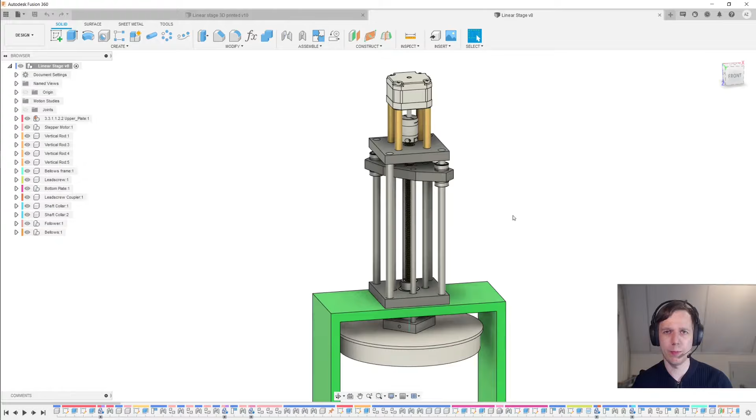In this video I want to show you how to model this thing right here. This is the pump module from the Polyvent project. It uses a stepper motor up here to turn this lead screw. And as that lead screw is rotated, this plate here moves up and down, and that ultimately causes a bellows which would be mounted between these two plates here to be compressed and expanded, which pushes the gas around.

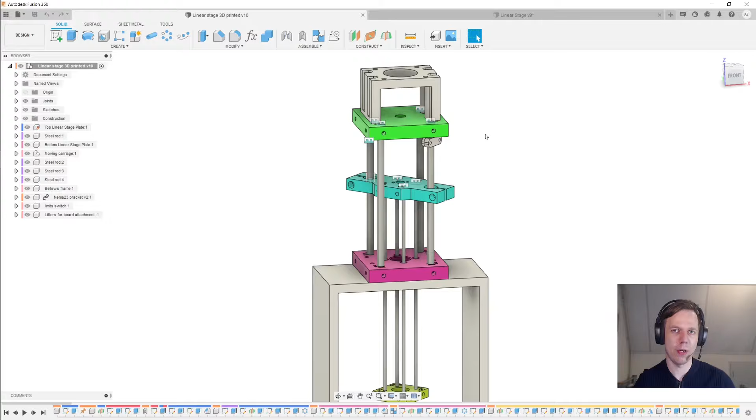Now I'm telling you that because I want you to know that this is a thing that we've built in Austria in real life. This is not a contrived toy example. And as we were building it, we came to a couple of design improvements that we've captured in this new design over here, though this design here lacks a couple of the features like the lead screw and the bearings. So today we're going to create a combined design that captures the best features of both.

Hi, Future Antal here. This here is the model that we're going to have by the end of today's video. The first thing I want to make today is this green plate over here, which supports both the motor bracket, these vertical rods over here, and it also has a pocket for the bearing to go into over here.

So let's create a new design, and here comes the first habit that you really have to get into. For every new multi-component design, the first button that you really have to press is New Component. So here I want an internal component. I want this to live inside of this file, and let's just give that a name of top plate or something. We can change our mind later if we wish. We also want to make sure here that we activate this component upon its creation.

Next, we'll create a new sketch, and I will put that sketch on this horizontal plane over here. I hit R for rectangle and select the center point rectangle there. And then I'm going to give this dimensions of 80 by 80 millimeters. This is mostly an educated guess at this point, though we can come back later to change our mind.

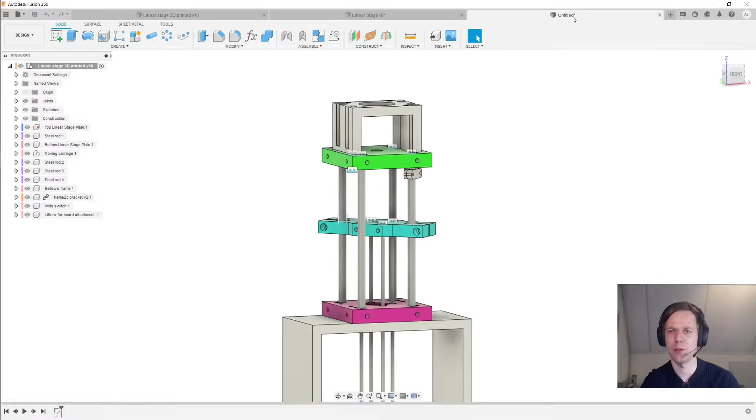Of course, it doesn't make any sense for me now to come to these files here and start taking dimensions here. That's just a chicken and egg problem then. So let's just take 80 millimeters for now. And I'm also going to create a second rectangle also from the center. And I'm going to make the diagonal distance here, let's say 90 millimeters.

And then I'm going to hit C for circle and create a couple of circles here. And those will be the pockets that the rods are going to go into. So select all these circles and give those the equals constraint, and then D for dimension and make that 8 millimeters. Now one of the things I'm interested in here is to check what the distance is between these two.

So you just hit D for dimension and you will get a driven dimension here. And now I do have a little bit of a problem here because I am getting 8 millimeters here, which means that the distance between this circle here and the edge of the plate is only 4 millimeters and a little bit, and that is probably not enough for what I want to do later.

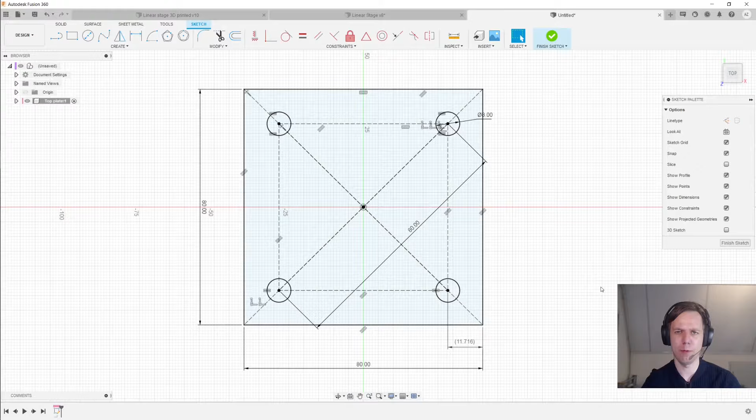So what I'm going to do right now is just change this distance to 80 millimeters, and that will give me more distance here. And again, if we need to, we can make this plate a little larger later on. So finish the sketch, E for extrude, and then we are going to extrude this thing up to, let's say, 10 millimeters thick. The next thing I want to do is create the hole for the lead screw and the pocket for the bearing.

So I'll create a new sketch and put that on the bottom of this plate. Then hit C for circle, and then one circle is going to be 22 millimeters. That's the outer diameter of a 608 bearing. And then the other one is going to be 12 millimeters because I want the hole to completely clear the inner race of the bearing. So first I'm going to take this inner bit here and extrude cut that all the way.

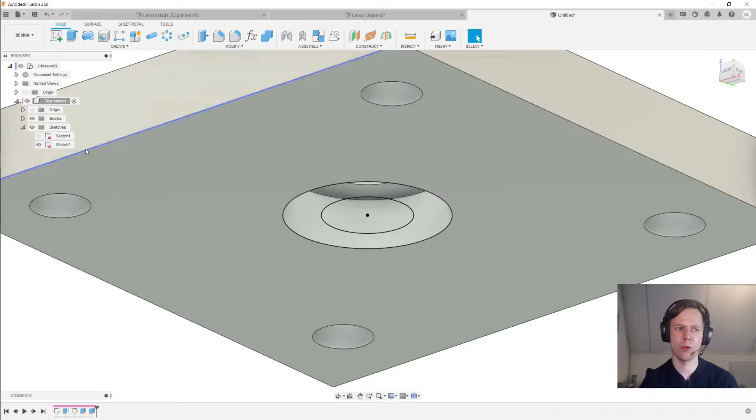Going back into the component, I unhide the sketch and hit E for extrude, then this thing is going to go up by 7 millimeters, also a cut. Now we have a pocket for the bearing to go into and a hole for the lead screw.

The next thing I want to do is add the steel rods that come out of this plate. To do that, first I go here and activate this root component, then create a new component and call it vertical rod. We can change the name later. We want to activate it and have that internal, then create a new sketch on this top surface.

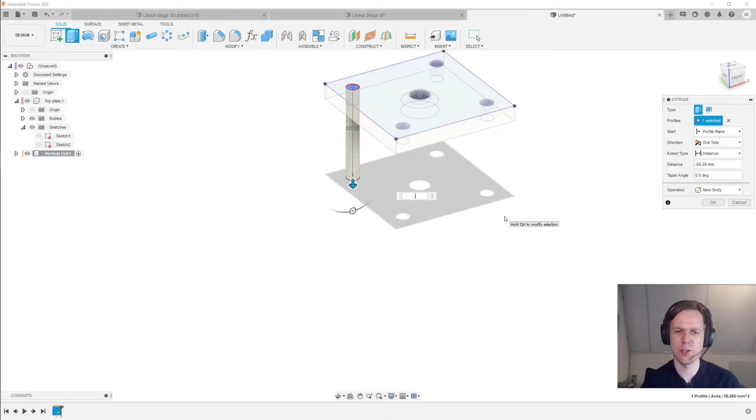I'll hit P to project that top surface in, and then I can finish the sketch. Now hit E for extrude, and extrude this downward by some length. Again, this is mostly a gamble at this point, so let's make it 200 — a length we can come back and change later. Operation here is going to be new body, so click OK.

Now we have a single steel rod, and we just need to make 4 of those. Before that though, there's an important problem to fix: these components can currently just float around in space like this. So hit Ctrl Z to put that back in its original position.

I'll activate this root component again on the top left, then right click this top plate and select ground. That means this top plate can no longer move around. What you eventually want is one component that is grounded — usually a base plate, frame, or casing, something to that effect — and everything else is fixed or moving in relation to that grounded component.

So now I want to create a joint between this steel rod and the center of this hole. I'll select flip here because I want it to point down, and under motion I want to ensure I have rigid. With all that set up, I click OK, and now both of these components are fixed in space.

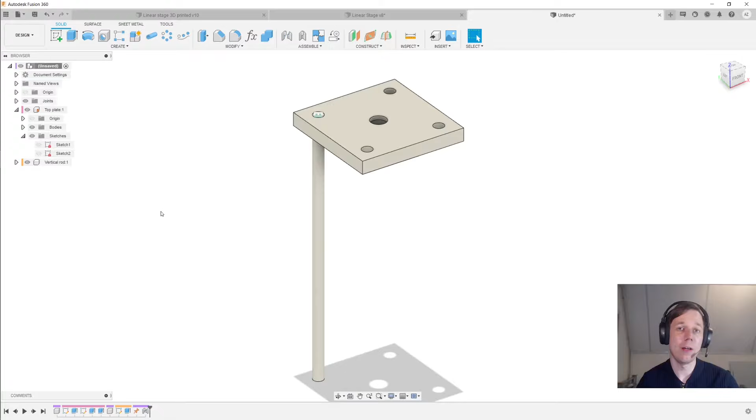Now let's create some more of these rods. I'll right click this vertical rod component and select copy, then right click the root component and select either paste or paste new. If I want these components to remain the same into the future, I select paste. If I select paste new, the new component lives an independent life from the previous one.

I want these rods to have the same length under all circumstances, so I'm going to select paste — I want these rods to always be identical. I hit paste, and then I try to line that up with the hole, but that's not going to work easily because of the dimensions we had before, so I'll just drag it out in space over here.

Then I'll create a joint again between this one here and that one here, and again that's just going to be a rigid joint. Click OK, and then we just have to repeat that two times over.

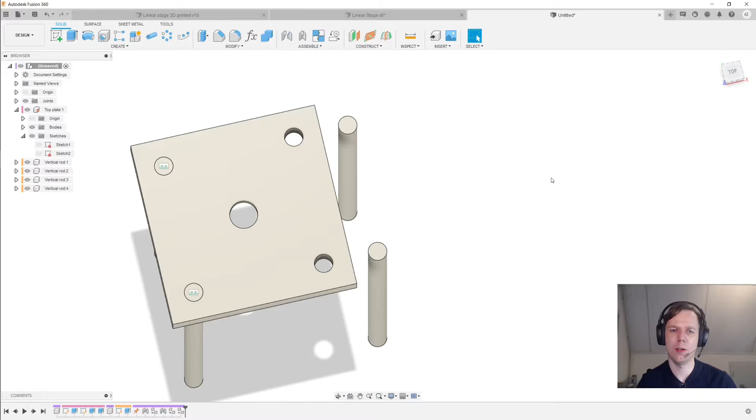Now I can select both of these two vertical rods and select copy, then under the root component, paste, and move them over to the side here. Click OK, and then again some joints — click on this thing, and if you hit Control it automatically snaps to this point of interest there. Flip that and do it again for the other rod. And there we have 4 rods.

The next thing we need to do is create a method for affixing these steel rods into this plate. Currently our intention is to 3D print this top plate, so we're going to use set screws with embedded nuts, and the first thing we need for that is pockets for those embedded nuts.

Let's first activate the top plate and create a new sketch on this top surface. Then from the center of this circle, I'll make a construction line, and then I hit R for rectangle and create a rectangle like this.

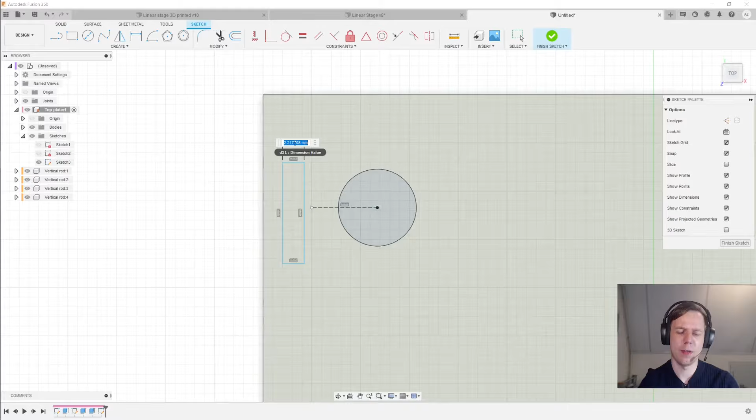And then this dimension here is going to be 3 millimeters, and this one's going to be 7. And we want the midpoint constraint between this line here and this endpoint of the line here. And then we want this length to be 5 millimeters so that it is a little bit outside of the outer edge.

Now we're basically going to repeat the same thing on the other side, on the top side. And here we're just going to use equals constraints so that we have the minimum number of explicit dimensions to drive this. And then these 2 need to be equal as well. So now I can finish the sketch.

And now when it comes to the nuts, you have 2 choices. The obvious choice is to use regular hexagonal nuts, but it is much easier to use and to model for square nuts. Now square nuts you can't find everywhere, but if you look around a little bit, you should be able to find them. You can get them at the Hornbach, for example, but also Conrad and a few other places.

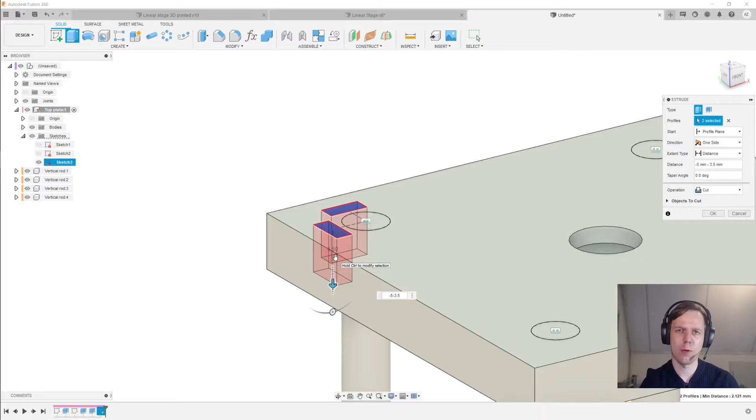So now I can just hit E for extrude. And we want to extrude this to the halfway point, plus another half times 7, which is going to be 3.5. Now we can do a little bit better than this.

So what we're going to do is construct a midplane between this surface here and that surface over there. And then click OK. And then we're going to hit E for extrude again on these 2 profiles, and then we're going to do it to this object here, with an offset of 3.5 millimeters. And in this way, if we change the thickness of this plate, then these pockets will still come out to the halfway point.

So now we can click OK on that, and we can also hide this construction plane that we just made.

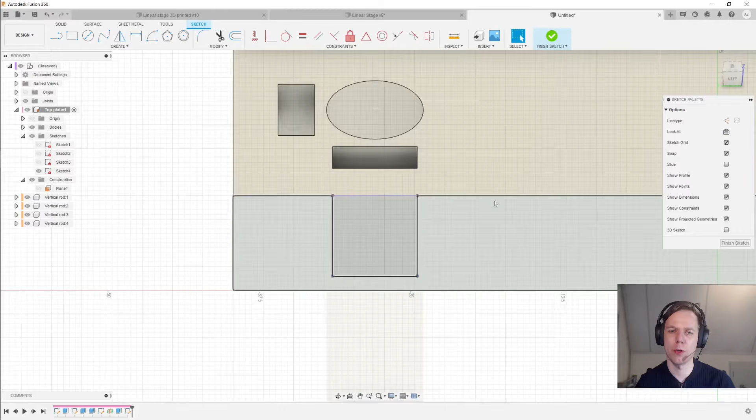The next thing we want to do is create the holes for the set screws to go into. So let's just create a sketch on this side profile over here, and then hit P for project. Project this rectangle into our sketch. L for line, X for construction, and then just draw a construction line straight down. And then hit C for circle, and in the center of this line you look for this automatic midpoint constraint.

And let's call that 4.3 millimeters. That's a good clearance hole for a M4 set screw. Now hit E for extrude, and we are going to do that to this surface over here, and then we're going to enter an offset of 5 millimeters. Okay, so minus 5 millimeters. And that ensures that this cut ends up all the way in the middle of this shaft and hole over here, so that it's certainly all the way through.

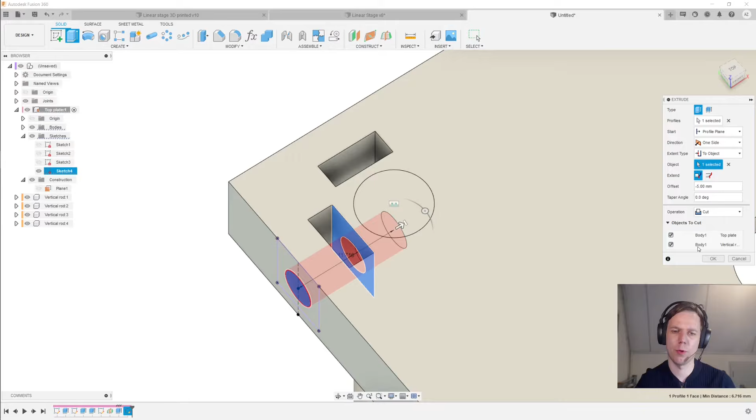Now the one thing you do have to keep in mind is that if you look under Objects to Cut, we do want to cut the top plate, but we do not want to cut into this vertical rod. That's not our intention here, so uncheck this, and then we can click OK, and then we just need to do the same thing on the other side.

So now we just go over to the other side, create a new sketch here, P for project, X and L, C for circle, 4.3, E for extrude, and again to an object with an offset of minus 5, and again under Objects to Cut, make sure that you uncheck the vertical rod.

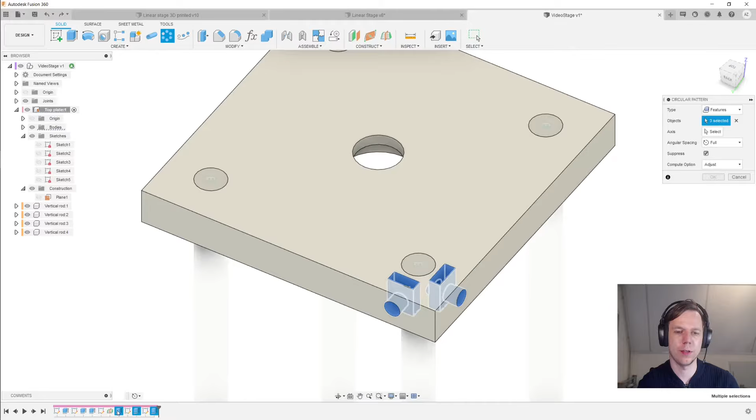Next thing we want to do is ensure that all 4 of these rods have these pockets. So under Create, we go to a circular pattern, and then the type will be Features, and it'll be this guy, and this guy. And that will go around this axis over here, this bore of the bearing. And then under the quantity, we want 4 of those, and then we can click OK. And then we have these pockets on all 4 corners of this plate.

The next thing I want to make is the bottom plate, and that's going to be largely identical to this top plate over here, but slightly different. So for that, I'm going to copy this top plate, activate the root component, and do a paste new in this case, because again, I want this thing to be not quite identical to the top plate.

So I'm going to pull this thing down over here, and in this case I can probably align that exactly, like so. And then we can click OK. Now of course at this point this new plate is free to float around like this, so Ctrl Z.

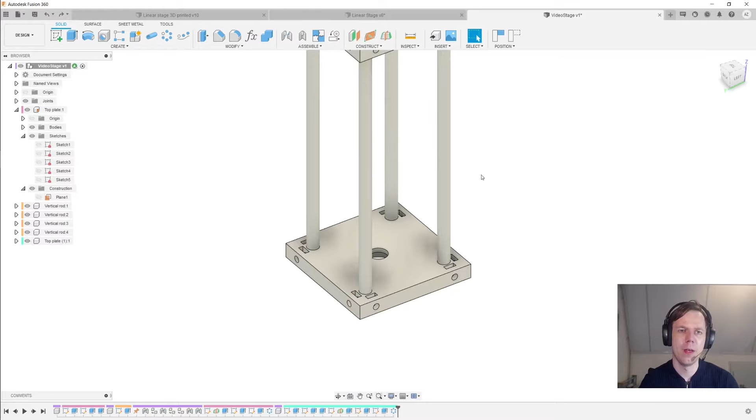And then we can use a different method to fix this one in place. So in this case we can use a rigid group. We're going to capture the position. We're going to create a rigid group between the rod and this bottom plate. And the advantage of using a rigid group is that for very large assemblies it has better performance compared to using joints that are set to a rigid motion. So now we can click OK.

And now I'll go over here and first rename this thing to bottom plate.

I'll activate this component, and then we can go onto the timeline here and start changing some things up. So the main thing I want to do is find the sketch that is responsible for this feature over here, and that is this sketch over here.

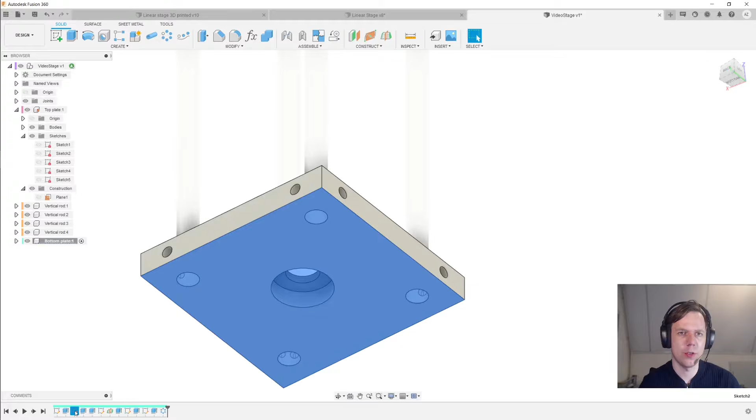We are going to redefine its sketch plane to be on top here. And for this it moves itself back up to where it came from, but that's okay.

Now that we've redefined the sketch plane, we see that the bearing pocket and this through hole here have reversed. So now we can put the bearing here, but on the other end the bearing is over here, yet at the same time the nut pockets are still all facing upwards on both of these parts.

One thing I should point out about the timeline in my case is that I have this tick box enabled, the component color swatch. That assigns a color to each of these components that you can see with this small stripe, and those colors match the colors above the features on the timeline.

The other thing about the timeline that you may have seen just a moment ago is that if I activate a certain component, the timeline constrains itself to that component and also the possible subcomponents that we'll get into later.

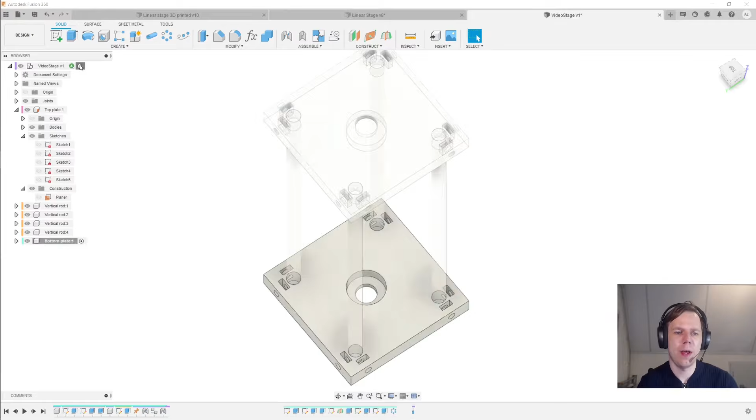The next thing I want to check is whether I can change the length of the rods while still keeping the model intact. So I'll activate the root component, and via the color matching I can easily see that this is the feature that I need to edit. Let's make these rods a little bit longer at 220 millimeters.

Now in this case I see that the bottom plate hasn't moved while it should have. So what I'm going to do is delete this rigid group that I've made, and instead I'm going to create a joint.

I'm first going to select this hole here on the plate and then the end of that rod. I'm going to flip that just to make sure it's in the right place, and that looks about right, so we can click OK.

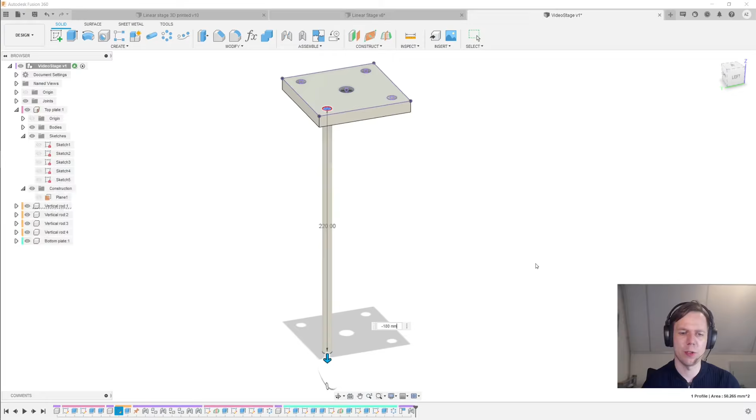The motion is rigid, so that's good. Once that's all set up, we can go again into this thing over here, and let's make that minus 180, or let's change it back to minus 200, and then everything keeps on working without any additional effort on our part.

Now I want to modify the appearance of this model because at the moment it looks a little boring and white. Here I really want to stress the difference between two different concepts.

One is the physical material, and this has the full information of a particular material: strength properties, thermal properties, all those kinds of things.

What we are going to do here is appearance, which only determines how something looks. Now, if you're interested in the total mass, the center of mass, moments of inertia, thermal simulations, stress simulations, all those kinds of things, then you will need to have physical materials associated to all of your parts.

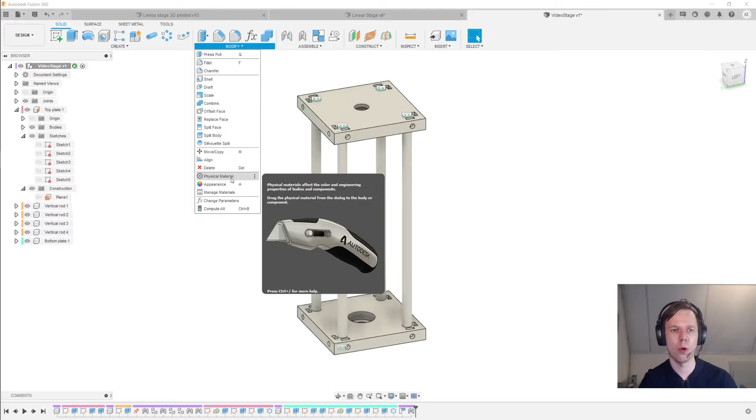If you are interested in those kinds of things, it may also be important to explicitly model all of these missing set screws and embedded nuts as well, because those will affect, for example, the total mass and the center of mass. For today though, the only thing we're going to do is appearance.

The first thing I'm going to do is look in the library for steel, and then a stainless steel polish looks rather nice. And because these four rods are all linked, they are always identical.

The other thing I'm going to do is duplicate this basic ABS material that we started with. I like to just apply bright colors to my parts just to make everything stand out from each other.

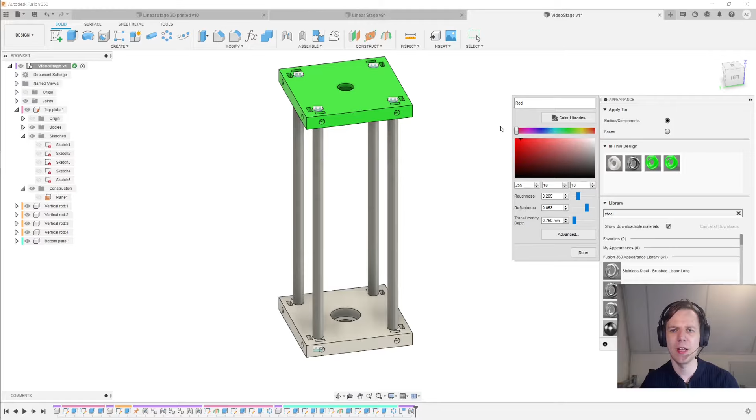So you can just duplicate this, edit, give this a name, let's call this red. I'm not generally more fancy about it than this. And just drag that onto the parts, and then I'll edit this to be named green. At least this far we have applied appearances.

Now let's get back to actually just modeling stuff. The next thing I want to do is add the bearings that go into both of these pockets.

First I'll activate the top plate component because I want this bearing to be a subcomponent of this top plate. Then I'll go to Insert, Insert McMaster-Carr component, and make this window a little bit bigger. Then here we're just going to type 608 bearing.

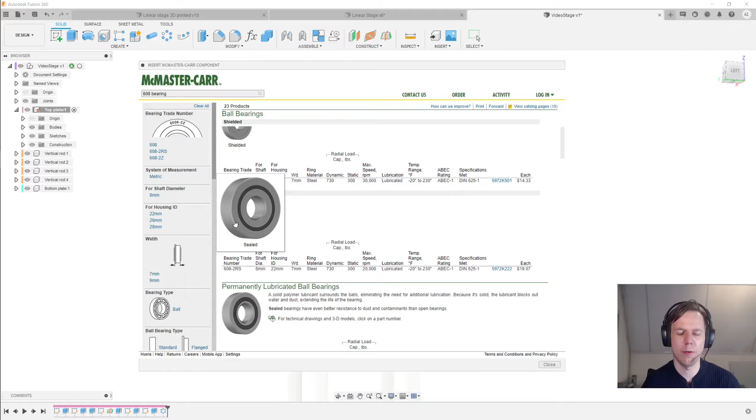And then here we are. Let's suppose we're going for a sealed bearing, a 2RS bearing, and I want the product detail here. This icon tells you that a CAD model is available. In our case we need a 3D step, download, and we get that model in here. I recommend dragging it to a place where you can see it and click OK.

The next thing you can do is just make a joint between this guy over here and this point over here, and click OK on that. And then the final thing you want to do is make this a 608 2RS. Just change the name from the default.

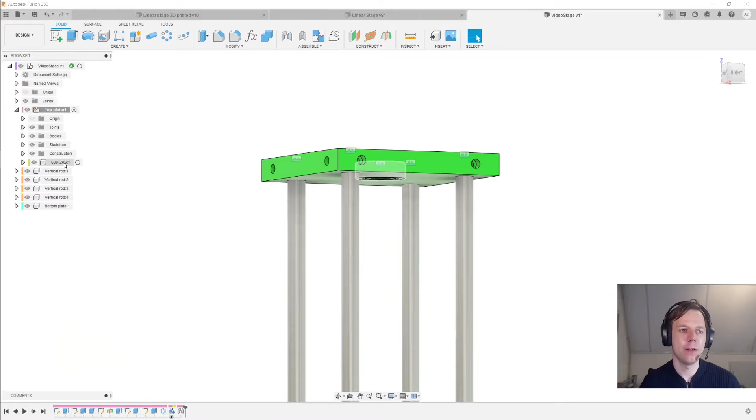Now, of course, we also want a bearing in the other plate. So what we're going to do is copy this guy over here, and then activate this bottom plate. We do paste because in this case we want the exact same bearing. Again we just drag this down to where we can see it. We don't want to drag it directly into position. And again we create a joint on this to this and click OK. And then we have both of our bearings in place.

The next part that I want to model is the lead screw that will go through the middle of all of this. So let's activate the root component and create a new component that I will call TR8x8 lead screw, or just TR8x8, that's fine. And I'll create a sketch on the bottom of this bottom plate here.

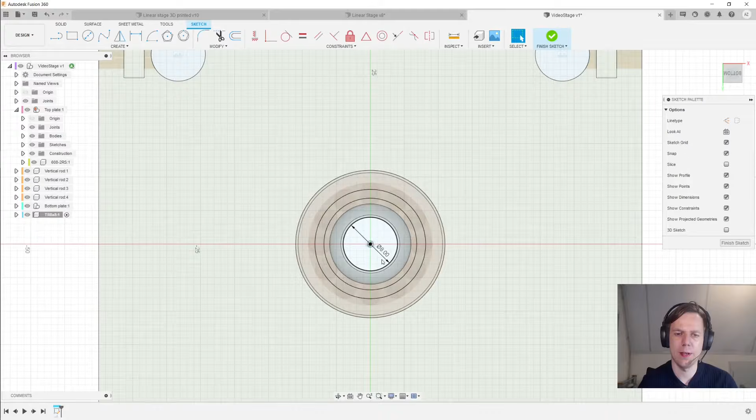C for circle, make that 8 millimeters. Finish the sketch, E for extrude. And then I'm going to extrude that all the way up to the top plate, so to object this thing here. And then I'm going to give it an offset of 20 millimeters, so it pokes out a little bit here, and that gives something for the coupler to hang on to. So click OK on this.

And then the next thing I want to do is go to thread here under create, and I'm going to select this thing here. And then here we have the ISO metric trapezoidal threads. Unfortunately the TR8x8 is not available here, so we're going to have to settle for this. If we really need the exact thread modeled, we can do that if we need to, but that's a bit too much effort for now.

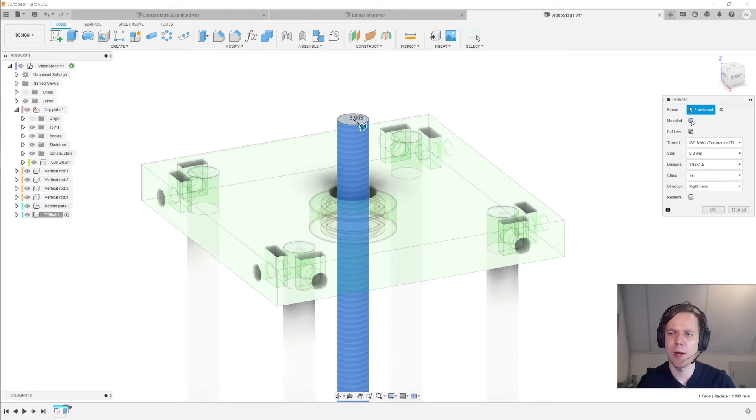The only thing that I want to point out here is that you have this tick box for modeled threads or not modeled threads. So if I tick that, we get the real model of a real thread. And if I untick it, we only get really a cylinder with a texture on it. Now the latter is much better for your performance, which is especially important if you have lots and lots of screws that you have applied such a thread to.

The next thing I want to do is create a joint for this new lead screw. So the first thing I'm going to do is activate the root component here. And the way that I've done this, I already like the position that this lead screw is in. Because of that, in this case, I'm going to use the as-built joint command.

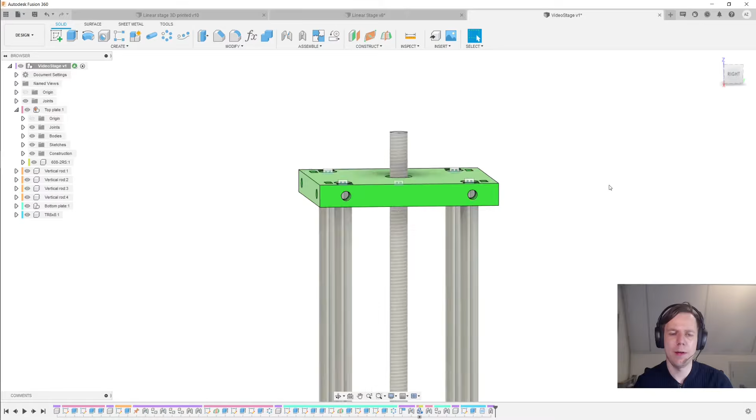So I want to joint this component here to this top plate over here. And the joint type here is going to be a revolute. Fusion wants us to put an origin for this revolute somewhere, so let's put that in the middle here. And that is looking pretty good to me, so click OK on that. And now we have this lead screw jointed to the rest of our model.

The next parts that I want to add to this design are the shaft collars that are going to hold this lead screw in place. Now to keep the file organized, I want these to be subcomponents of the lead screw. So I'm going to activate the lead screw component first and then insert a McMaster-Carr component again.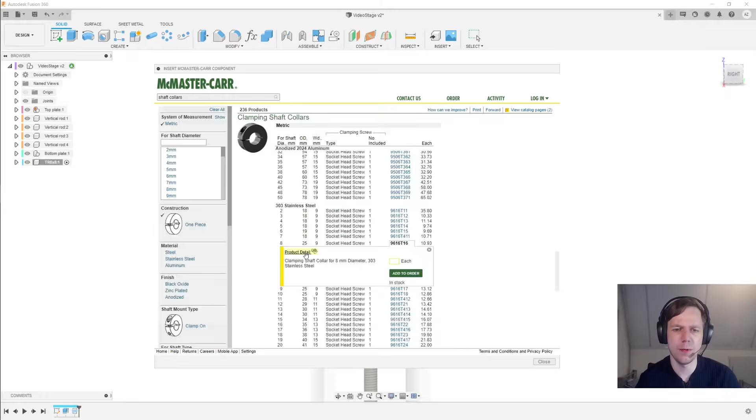And then we are going to look for a shaft collar. We want a metric one, of course, and I want a one-piece design. Here we want a clamping shaft collar, since the type that pushes a set screw into the shaft, or in this case the lead screw, doesn't really work. So it has to be a clamping variety. Now I don't want any of the aluminium ones, and I also don't like black oxide, so I'm going for this 303 stainless here. And then download the 3D step.

And then we can put this off to one side here. And now we need to make this joint, and that's going to be a little bit more complicated.

Now what we want to do for this joint is joint up the center of the shaft collar here to this lead screw. But when we try to do that, we can only snap it to either the middle or the ends of the lead screw, and that doesn't really work.

Now what we want to do is put it right over here, but if we select it in this kind of a way, then it will actually be jointed to this top plate, and that is incorrect. We want this jointed to this lead screw.

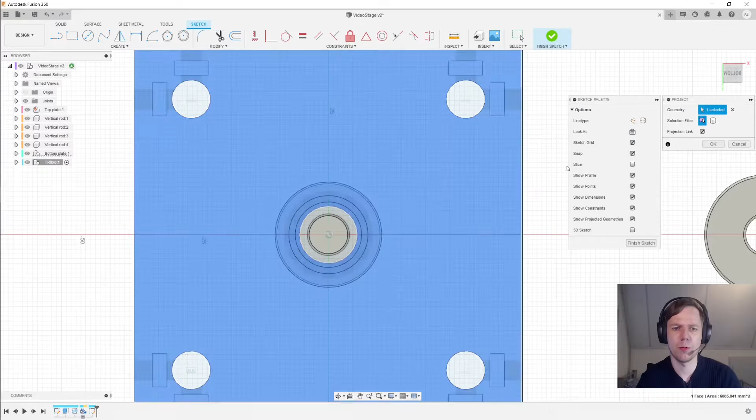So what we're going to do instead is create a new sketch on this plane over here. We are going to capture the position here just to make sure that this lead screw doesn't fly back on us. And then we can just project this into the sketch and then finish the sketch.

And what we can do now is create a joint between the shaft collar like we tried before, but now we can joint it onto the sketch geometry that we have here. And now we can click OK on this.

We have a rigid joint, so that looks good. And now we have this shaft collar jointed to this lead screw, as you can see like this. As I'm turning this lead screw, the shaft collar turns along with it, and coincidentally, so does the sketch.

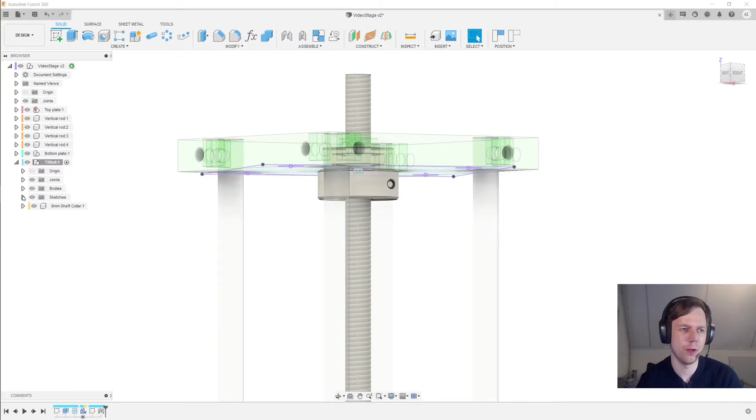So the next thing I want to do is create the next shaft collar. And so first I'll go in here and rename this 8mm shaft collar. Again, you want to have names on everything so you don't lose track of what's what. I can now hide this sketch over here.

And the first thing we'll do is create a new sketch on this bottom plate here. We can just press continue here. We don't need to capture position. We project all this stuff in so we get this center point of the circle. And then we can already finish the sketch.

We copy this thing, and then again we press paste on this here. So paste here, and we do it on this component here and not on the root component, because again we want this shaft collar to be a subcomponent of this lead screw, because that keeps everything a little bit more organized.

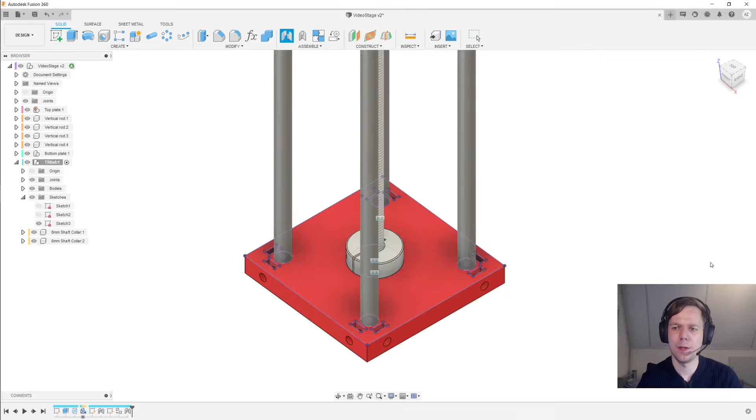So now we can click OK, and then finally we can do another joint between this guy here and this sketch point over here. And here we want to flip it so that it comes out on the other side, and then we can click OK on that. And now we have two shaft collars to keep our lead screw in place.

And as we turn this, they both turn along with this lead screw. So final thing here, hide the sketch, and we're ready to continue.

Now one thing is a little bit weird here. We have this component here that contains the lead screw, and it has in a way 3 subcomponents, the lead screw itself and the 2 shaft collars. But the lead screw is a body while the shaft collars are components, and that's just a little bit weird. It's weird to treat them differently like that.

So what I'll do is create a new component, and I will create that from a body, and that's going to be this body over here, so this single body here, and then click OK. But the issue now is that our joints are a little bit messed up. So now this new thing here can just float around like this.

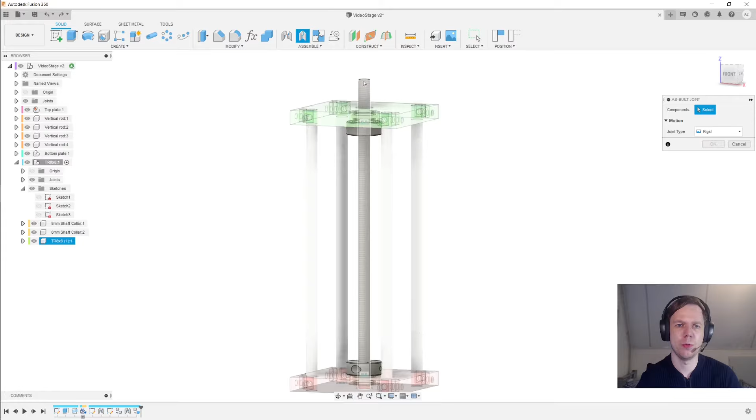So what we can do, for example, is do an as-built joint now between this guy and this guy here. And that's going to be rigid. And now we have a revolute joint here between the root component, or rather this top plate here, and the whole lead screw component as a whole. And then within that lead screw component as a whole, we have the subcomponents that are appropriately jointed.

So now if I animate this model here, we see that both of the shaft collars are turning correctly, and also that the lead screw itself is also turning. So now we fixed the organization of the file a little bit while also making sure everything still works.

The next part I want to add to the design is the stepper motor that goes on top of the lead screw to turn it. The first time we built this, we used a NEMA 17 stepper motor, but we quickly found out that doesn't provide enough power, so this time I want to use a NEMA 23 motor.

McMaster-Carr has a couple of these in the catalog, but not the exact one I want to use, and that's important because the length between them varies a little bit. So I'm going to create a new design.

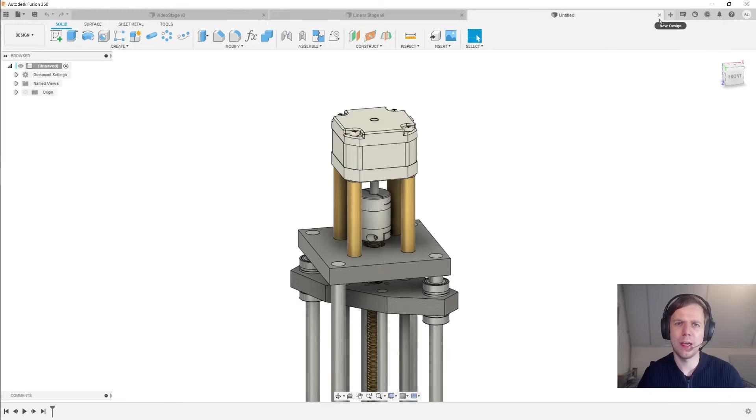I'm going to create this motor in a separate file because I might want to use it in other projects as well. For this motor I'll be using two components: the motor body, and the motor shaft that will stick on the end with a revolute joint.

Designing this motor is fairly straightforward. You can find technical drawings for the faceplates online, and then some of the other measurements like the thickness of the faceplate and the length of the motor you can just measure on your motor. So I'll just design this motor real quick.

Here's the model for our motor. We simply have a motor body with a shaft. The body is grounded, and then the shaft has this joint here so that it can spin.

What we need to do now is insert that into our overall design. So we open up the data panel, look for where this motor is, right click it, and select insert into current design.

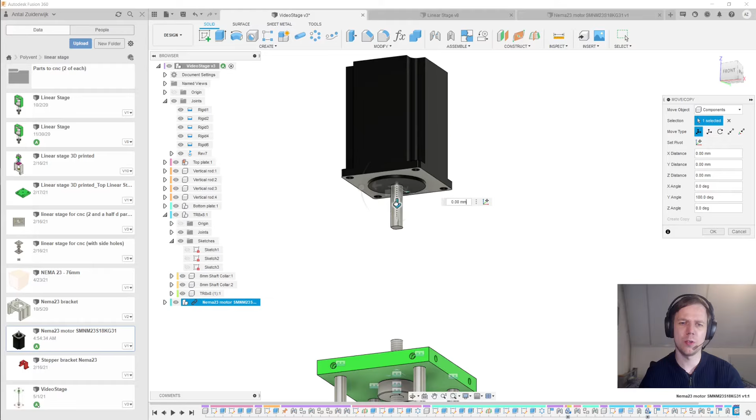I'm going to move it up a little bit and then rotate it, just to put it in rough position right now, because the next thing we need to make is a bracket so that this motor can be held there.

I want to pause here to emphasize the difference between how Fusion 360 handles files, components, and assemblies versus how other CAD systems might do that. In most CAD systems you have parts that live in part files, so every part has its own little file, and how they go together is described in an assembly file.

An assembly file can also reference other assembly files, making those sub-assemblies. Now in Fusion 360 there is no distinction between a part and an assembly—both of those things are a component.

Every file has this root component to begin with, but can also have components that live inside of this root component, and components that live inside of those. That is the Fusion 360 equivalent of having an assembly with sub-assemblies and sub-sub-assemblies.

If you want, you can just make a single part inside of a single file, and then use the method we used to import this motor to make what is essentially an assembly file. If you're on the hobbyist license though, that becomes a little tricky because you're only allowed 10 editable files at any given time, and that becomes a chore because most of your product will have many more than just 10 parts.

Whatever the case may be, let's get back to this motor bracket thing. So I'm again going to create a new component that I'll call motor bracket. And then I'm going to right click on the motor component here and select isolate.

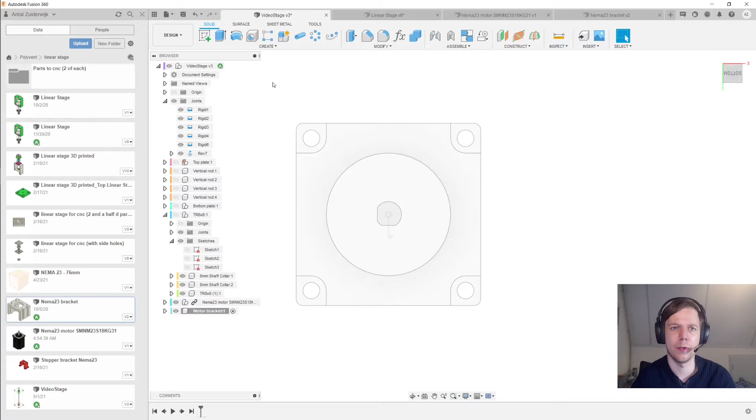I'm also going to isolate the motor bracket by pressing the little I here, and that ensures I can work on this without getting distracted by all the other stuff in the file. Now I'm going to create a new sketch on the face of the stepper motor.

I'm going to project that in, and then offset this circle to give me a little bit of clearance. Then I'm going to create a rectangle out from the center, 80 millimeters to match the width of the linear stage itself, and the other side 60 millimeters should be enough.

Now we can hit E for extrude on both of these profiles, and then go down here by about 10 millimeters.

Now let's create the vertical legs for this bracket. I'm going to this surface over here and create a sketch, and what I'm going to do first is create a construction line from the middle to the origin here.

And also from the origin vertically, like so. Those are going to be used as mirror lines in just a second. I'm also going to draw a construction line here, and a regular line like so, and then we are going to put a circle here.

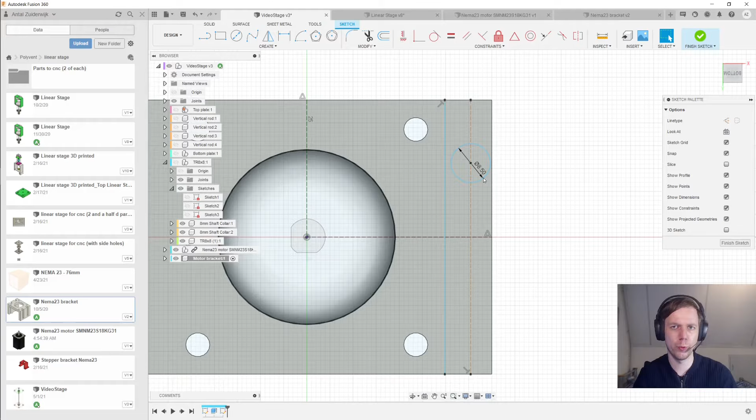Now I'm going to use M4 screws to tie the bracket to the rest of the assembly, but I actually need 8.5 millimeter holes here because I want the full screw, including its head, to go in there. So let's put this 15 millimeters above that center line, and then I want these three lines to be symmetric, like so.

Now we can check - well, first let's put in the polygon here. I want to use M5 screws to tie the motor to the motor bracket, so that means this is going to be vertical. And this distance is going to be 8 millimeters, because that's just the distance between flats of an M5 nut that I'm going to embed in here so that I can tie the motor in with an M5 screw.

So now we can figure out how much distance we can have here. Let's try 10 - that still fits. Does 12 fit? So 12 still fits. That's nice, and now we have 1.75 millimeters worth of meat here. That's not great, so let's see if we can improve that.

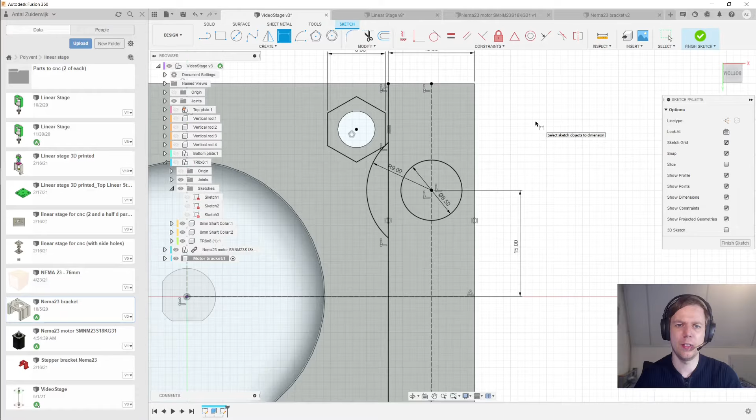I'm going to create a center point arc here between the center of that circle to this line over here. Let's make this coincident as well. And then let's give this a radius - well, not of 9 apparently, but we can do 8 millimeters here.

Now we're going to do a little bit of mirroring. So we're going to pick up all of this stuff here and mirror that along this line here, and next we're going to pick up all of this stuff and mirror it across this line here.

Now we are ready to extrude, but first we need to figure out how far to extrude all of this. So let's unisolate this motor over here so that everything else comes into view. Then I can see that if I select this surface over here to this surface over here, that there's 21 millimeters - the shaft here is 21 millimeters proud of the bracket.

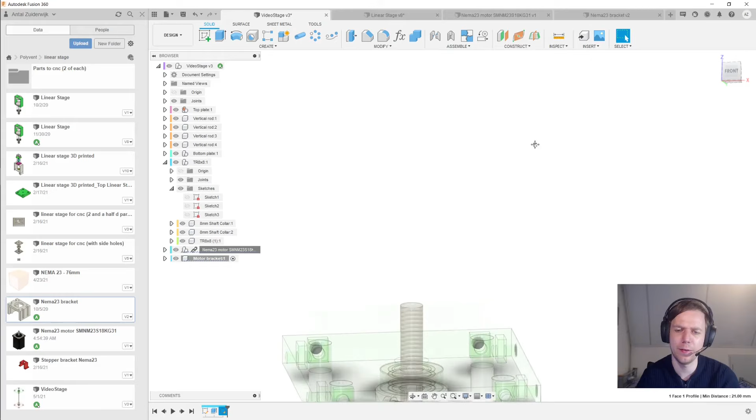And if I go to the other side here, we see that the lead screw is 20 millimeters proud of this surface over here. So in total, that means we need 41 millimeters, but we also need a little bit of space for the center part of the coupler to go into. So what I'm going to do is extrude this 55 millimeters - select all of these profiles and then do 55 millimeters and click OK.

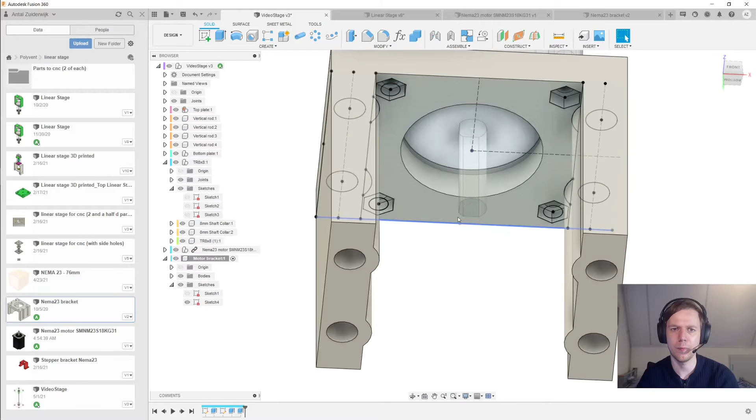Then the next thing we're going to do is go into this component over here and unhide the sketch. I'm going to take these hexagons here and do that -4 so that we can embed the nuts. And we are also going to left click and hold this profile here, here, here, and here, and extrude that upward to this face over here.

So the idea now is that we're going to take a screw and drop it all the way in there. We're not quite done yet with this bracket - the next thing we're going to do is create a sketch now on the top surface here.

I'm going to draw some lines out from the side here and make sure that those are tangent to this circle, and then make them horizontal as well. That immediately completely constrains them. And then I'm again going to do the same thing with the construction line to the center, like so.

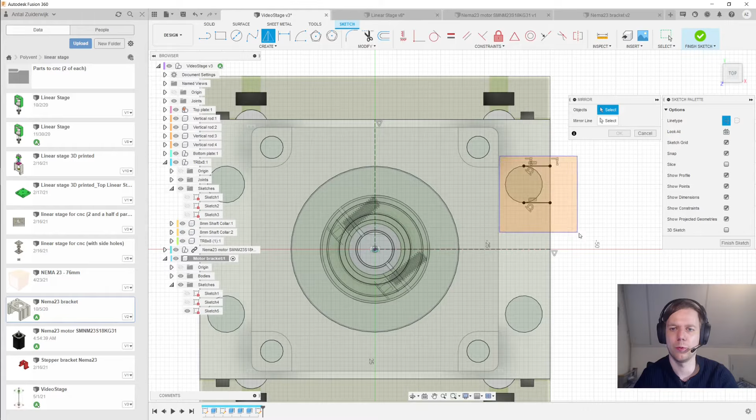Then again we can do some mirrors - mirror that this way, and then take all of this and mirror it that way. Finish the sketch, and next we can take these profiles over here.

And then extrude them to the bottom of the bracket, and then we are going to offset that by 10 millimeters, and we need to go in the other direction. So like so, and then we can click OK.

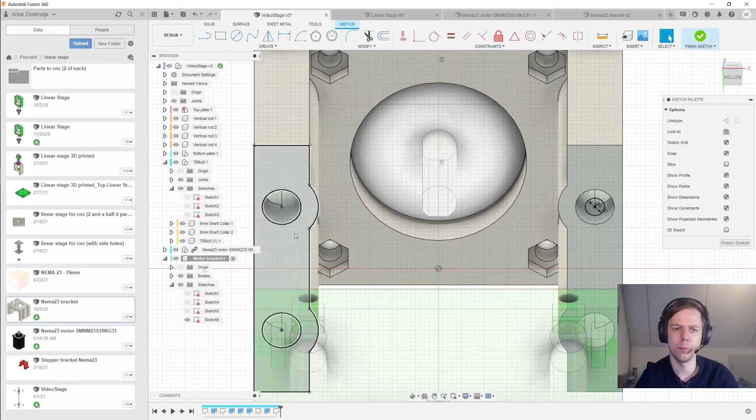Then the next thing we are going to do is go to the bottom of this bracket and do the same kind of thing. So let's create a circle here of 4.2 millimeters - that's going to be a clearance hole for a screw. And let's just do the same thing on these over here.

Let's make all of these circles equally large. Finish the sketch, E for extrude, and then this here is going to be 10 millimeters.

I don't think I did that right. I did not. 10 millimeters.

Now what we have here is a place where we can put the screw in, and there is also space here for the head of the screw. And then it's going to stick out the bottom through this hole here.

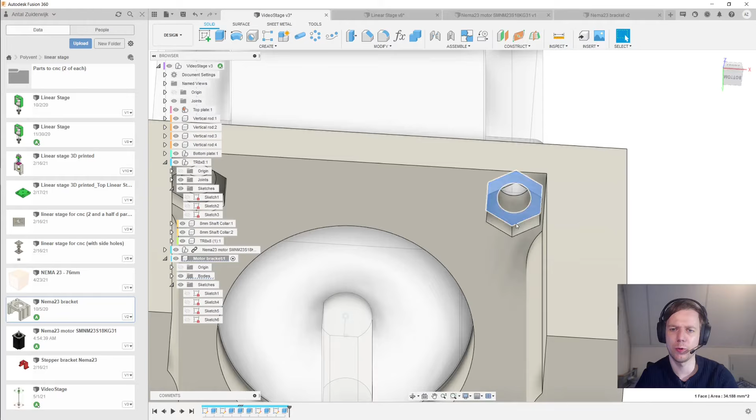Notice also that in the last operation we also created these hexagonal pockets for these 5mm holes over here, and those line up exactly with the motor, and of course that alignment is automatic because we projected the front face of the motor into that sketch.

Now at this point we can start doing some more joints, so let's close up a couple of these things that we don't need. The first joint I'm going to make is an as-built joint, between the body of the motor and this motor bracket, and that's going to be a rigid joint.

The next thing I want to do is joint the motor bracket onto this plate over here. And again, for that we're going to create a quick little helper sketch.

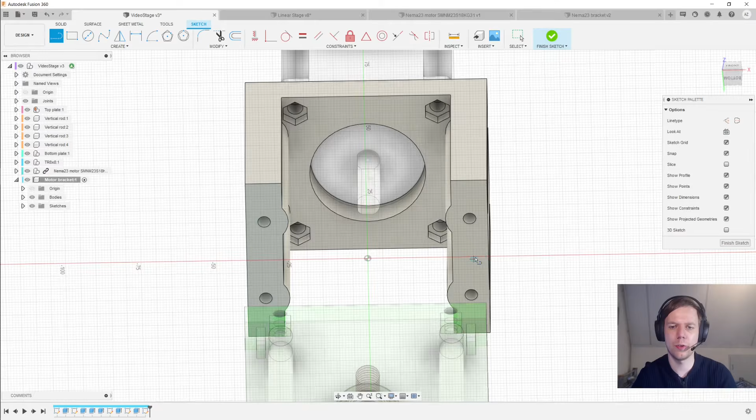So I'm going to create a sketch on here and create a construction line. Let's project first, and then create a line from the center here to the center there. Then finish the sketch, and then we should be able to joint this point over here to the center of that bracket over here.

Now at this point it only shows the motor bracket moving, but as soon as I click OK on this, first check the right motion, then the motor will also come along with it. And here we see that we have a little bit of space now between the two shafts, and that's where the central bit of the coupler is going to go.

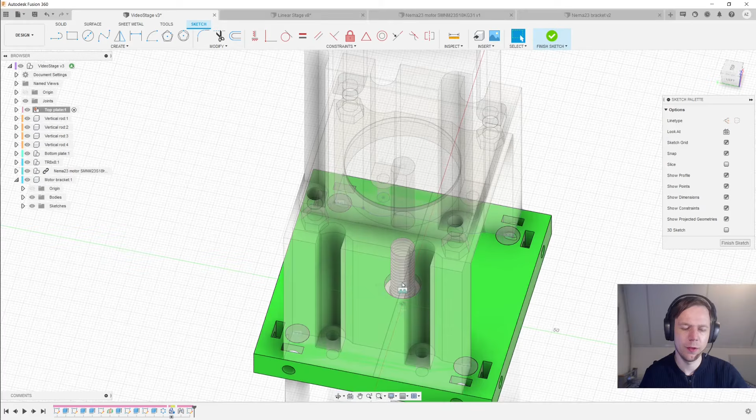Before we get into that though, I'm first going to activate the top plate component over here and create a new sketch here on this bottom surface here. And then I'm going to project these circles, or these cylinders rather, into the sketch.

Click OK. And then concentric with those, I'm also going to add some circumscribed polygons. I misclicked there. I'm going to make all of these vertical. Next I'm going to make all of them equal as well. And then the distance between flats is going to be 7 millimeters because this is going to be for an M4 nut.

So E for extrude, select the holes first, go this way all the way, and then under objects to cut, if everything's going alright, we will only be cutting through the top plate.

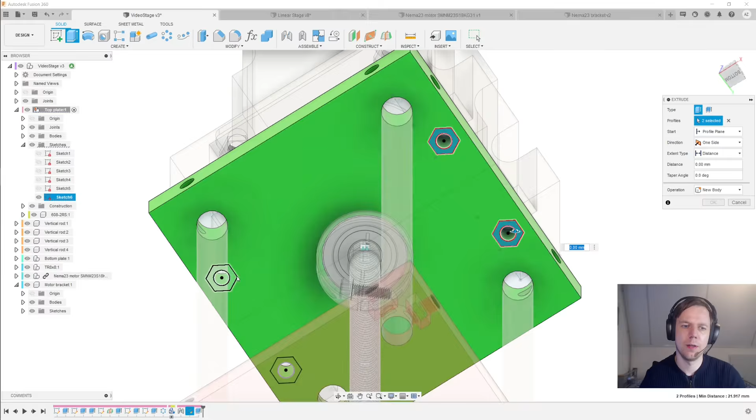So click OK. And then we're going to go in here and unhide the sketch, E for extrude again, and then we are going to extrude this -3 millimeters to create a pocket for the nuts to go into.

I now want to move on to what's probably going to be the final major part of today's video, and that's going to be this follower over here. So this thing is going to take that rotary motion from the lead screw and turn that into this up and down motion, and as it does so it has these linear bearings to slide over these two rods over here. So this is a component that has a whole bunch of subcomponents inside of it, so we can immediately take that into account.

So let's activate the root component, and let's first create a follower component. Then once that component is ready and active, we can create another new component, and let's call that the thrust plate. And now we can start modeling.

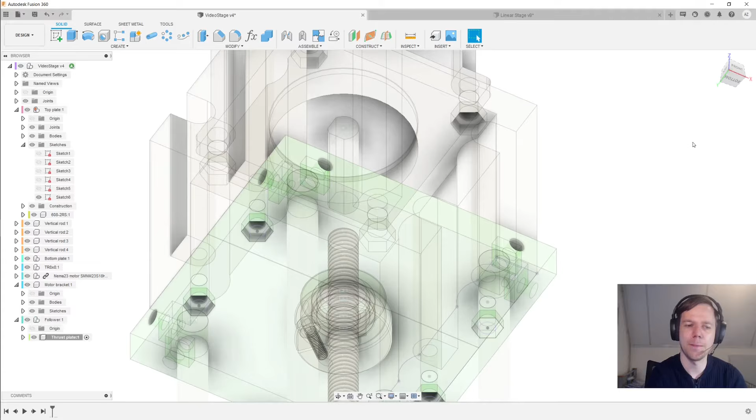So I'm going to create a sketch, and I'm going to put that sketch on the bottom surface here of this shaft collar, because that's effectively going to be the end of travel of this follower.

Next, I'm going to include some geometry via intersection, and that's going to be 2 of these vertical shafts and then the center lead screw over here, and click OK. And now we can isolate this component that we have here to ensure that we just get what we need here and we don't get distracted by everything else.

So at least on the outset, I'm going to make this plate rectangular. And I need to use a 3-point rectangle here because it is not horizontal or vertical with respect to the coordinate frame. So I'm going to make a construction line now diagonally between these two lines here.

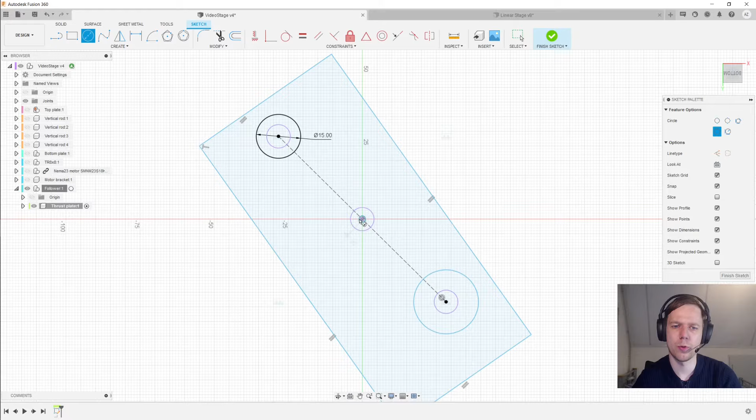I'm going to do C for circle. That needs to be a not construction line. And this is going to be 15 millimeters. Also a circle here and a circle here. This is going to be 10.5 millimeters. That's going to hold the T-nut, the trapezoidal nut.

And of course these two have to be equal. These two lines here have to be symmetric around the center axis. And then we can start figuring out, if I select this sketch point here, how far I want to have this apart. Now I need 7.5 millimeters for the bearing to begin with, and then I also need about 7 millimeters for an M4 nut because I want to clamp the shaft or the linear bearing in place with it. So here I'm going to select 20 millimeters just to be safe.

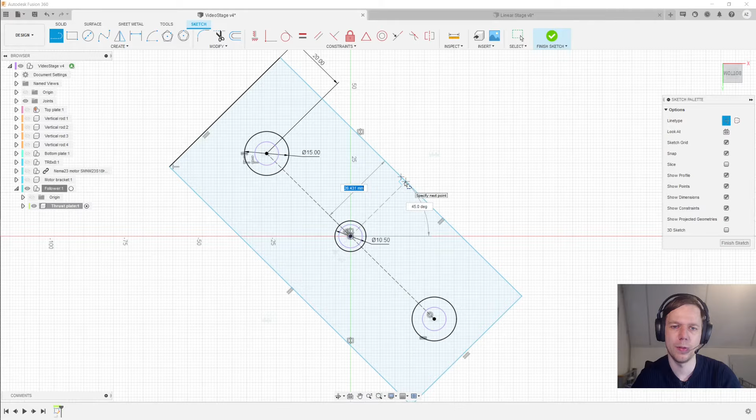And then I'm also going to create a construction line like so. That doesn't need to go to the midpoint, it just needs to be perpendicular like so. And then I can make this symmetric around the middle as well, so the other side is also good, driven by just a single dimension.

And then finally, hopefully we're going to fix this. I think 30 millimeters will probably do the business, probably need a little bit more for some of the stuff we need to add later. So finish the sketch. Now we will unisolate this.

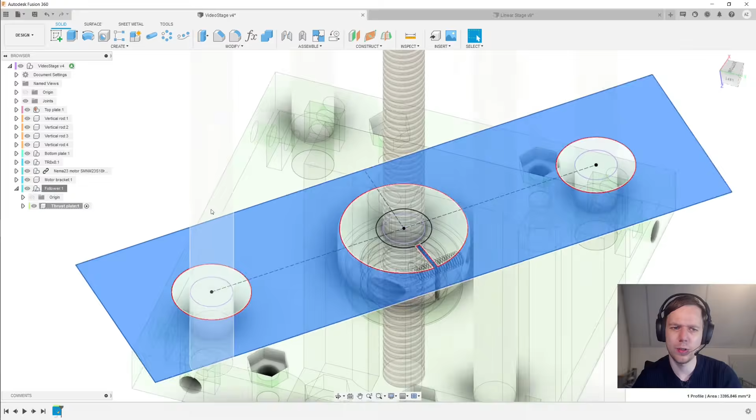And then we can hit E for extrude. And here we have a little bit of an issue because we started the sketch on this thing over here. So let's see what we want to do here. Actually, we just want to extrude all of it. So we want to extrude this.

And next, how thick do we want this plate to be? Well, I think 10 millimeters will do. That looks about right to me, so click OK.

Let's continue. The next thing I want to do is create the holes for the push rods to come through. So I'm going to create a sketch on this surface over here, and then make a circle in the middle, and give that a diameter of 30 millimeters. I'm again going to isolate this component here so that I can see what I'm doing.

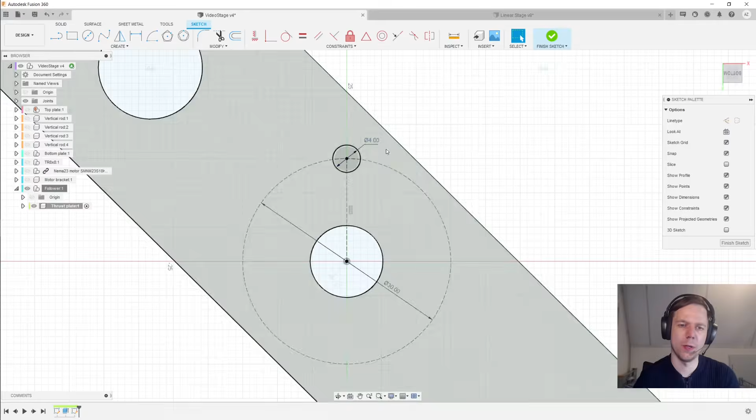This can be construction geometry. And then I will draw a construction line like this, so that I have this point over here. And then I'm going to create a 4 millimeter hole for 4 millimeter rods. I'm going to create a circular pattern of this circle around this center point here, and I'd like to have 4 of these rods, and click OK.

Finish the sketch, E for extrude. And then I'm going to extrude these 4 circles down this way, all the way. And the interesting thing here now is that under objects to cut, we only get this thrust plate now.

So if we do this and we unisolate this component here, we see that there was a lot more stuff above here through which we could have cut. But we didn't do that, and we couldn't do that because that stuff was hidden.

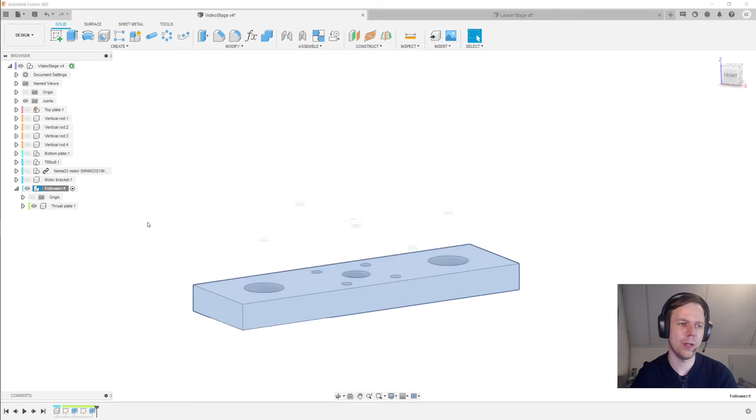So now I'm going to create the push rods themselves. And for that, I'm going to activate this follower component here. I'm going to isolate it again, and I'm going to create a new component that I will call push rod.

And for this, we're going to create a sketch on here, project this in, and then we can simply take this bit here and extrude that downward by, let's say, minus 250 millimeters. Again, we can change our mind later.

Now, what we did before is we did a copy and then a paste new, but that is actually a massive waste of time. So what we're going to do instead here is a pattern - a circular pattern of type components, specifically this component here around this axis here. I want 4 of those, click OK.

And then finally I'm going to do a rigid group between the thrust plate and all 4 of these push rods, click OK. And then we have all of our push rods in place.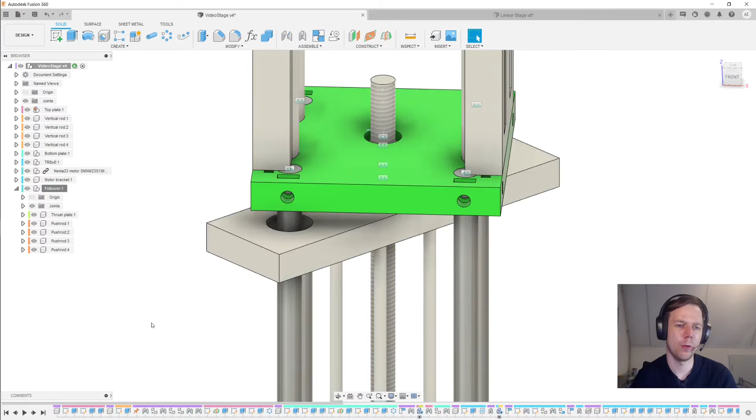Now when I go back into the root component and unisolate this follower here, we will see that we have these rods now sticking through this bottom plate over here.

And Fusion 360 has a tool to automatically detect such things, which is the interference analysis. So we can just run that analysis on the root component and press compute. And then what we get here is that we have 4 push rods that are interfering with the bottom plate over here, and we also have the volume here that they're interfering in highlighted.

And we also used this tool before, for example, to check the meshes in the gear tutorials that I've done. So this is a handy tool to have, but let's move on with modeling. At this point, our pusher plate subassembly is still able to float around like this, so of course we now want to joint it.

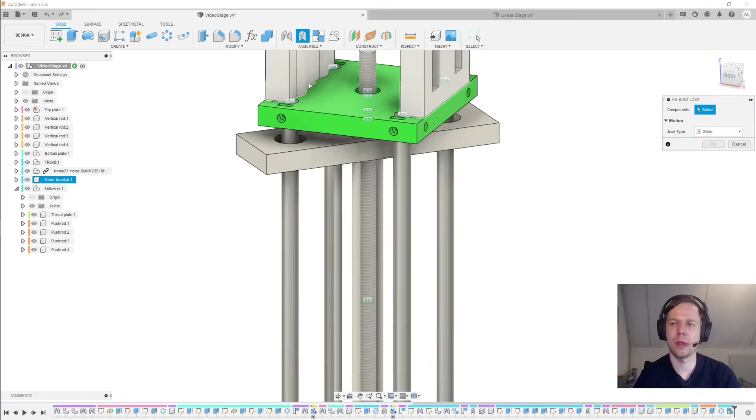For that, I'm going to use an as-built joint between this thrust plate here and this vertical rod over here. Let's put the origin of that joint over there, and then click OK. Now we can drag this thing up and down, but it can no longer float around otherwise.

One problem we still have is that it can just float straight through this thing here, and also at the bottom here, so that's up next to fix. I first want to fix that interference we had here at the bottom plate.

I'm going to activate this bottom plate component and create a new sketch on the bottom surface of that plate. Then hit P for project, project these push rods into my sketch, click OK. Then I'm going to create some circles concentric with those push rods, make those all equal sized, and that size is going to be 6 millimeters.

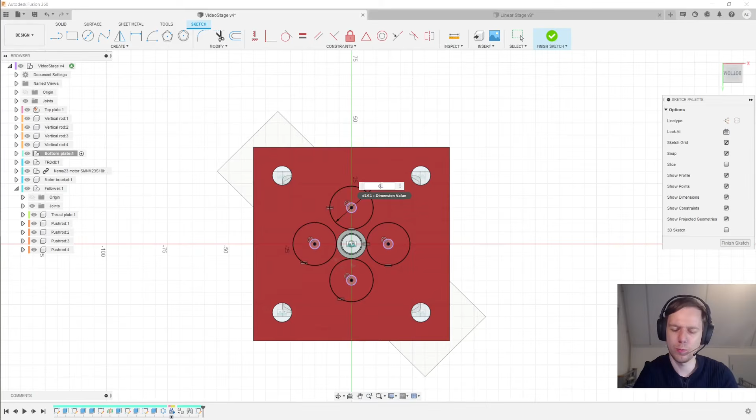That will either give us enough clearance so we don't have any rubbing, or we can put a bushing in there, since the outer diameter of a bushing will be 6 millimeters in that case. So we can just extrude this up to this top surface, ensuring under objects to cut that we do not cut the push rod, and click OK. Then we should no longer have any interferences. So inspect interference on the root component, compute - no interference is detected. Now let's turn our attention back to that slider joint over here.

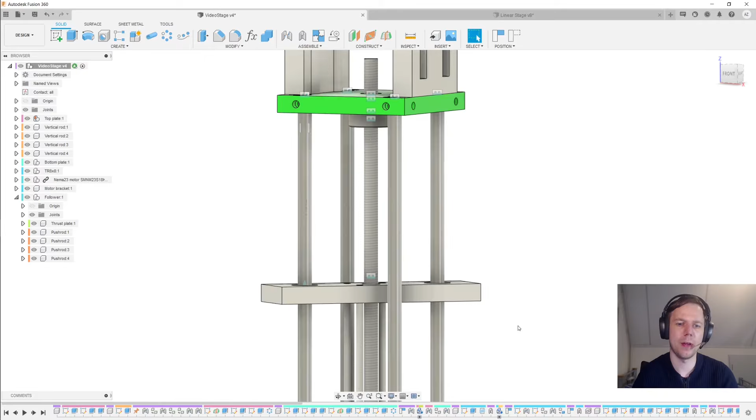The first way we can fix this slider joint going through other components is by enabling contact sets. Under Assemble, I will enable contact sets and ensure that all bodies contact is enabled. Now I can push this thing up and down, but as it hits either the bottom or the top, it will basically stop there. However, this isn't completely perfect, because if I apply enough speed, I can just phase through this wall over here. So contact sets can work okay, but they don't work that great.

Also, I removed this interference here first, because if you have an interference like that, a contact set will basically bind up your model entirely. And finally, contact sets can also be quite difficult to compute. So with all of that, they are not a great solution, but sometimes they are the solution you want.

So for this model, I'm going to disable the contact set. I don't really find that a great solution here. I will go to this slider joint and set that to 0. Then I'm going to add some limits to this joint. The joint limits here are going to be a minimum of 0, and then the maximum is going to be probably something like 150.

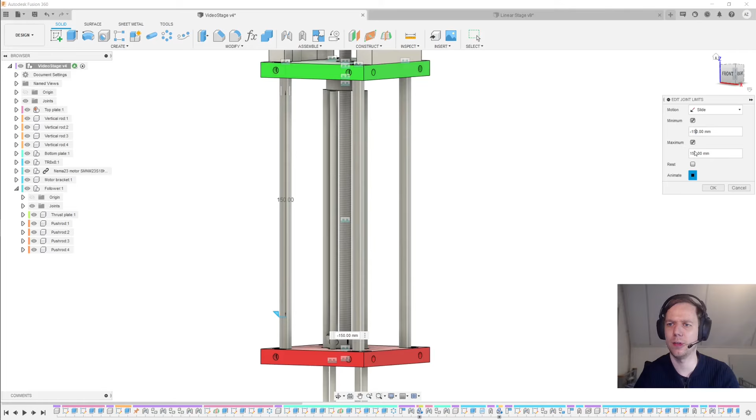So we can animate that. It's going to actually be the reverse in this case, so minus 150 to 0. Then we see that we don't get all the way to the bottom here, so we can cancel this for a minute and figure out how far this needs to go. We can just drag that down here, and then we read here that this is actually minus 150, so that was almost correct.

So let's now actually set those limits. The limits here again are going to be a minimum and a maximum, with a minimum of minus 150 and a maximum of 0. If we animate this, we see that we get basically the right idea. Once we click OK on that and just drag this up and down, we see now that we have actual limits that we can't pass through by just applying enough speed.

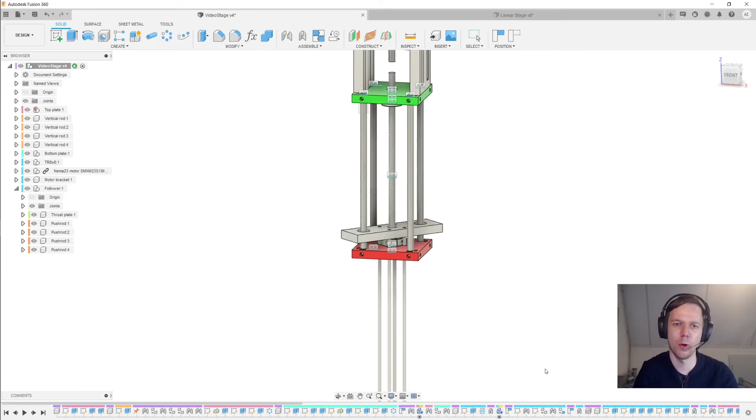That doesn't work. And also now the push rods are again coming along. Again, in the animations this doesn't always happen, usually it doesn't, but once you click OK, everything will snap into place as expected.

The next thing I want to do is ensure that the rotation of the lead screw is tied to the sliding of this pusher plate here. So for that, I'm going to create a motion link. I'll continue here - I don't need to capture this position. The joints I want to link are this rotating joint here and this slider joint here. What we want to do is ensure that if we have a 360-degree rotation, then this thing has to slide 8 millimeters. Click OK on this.

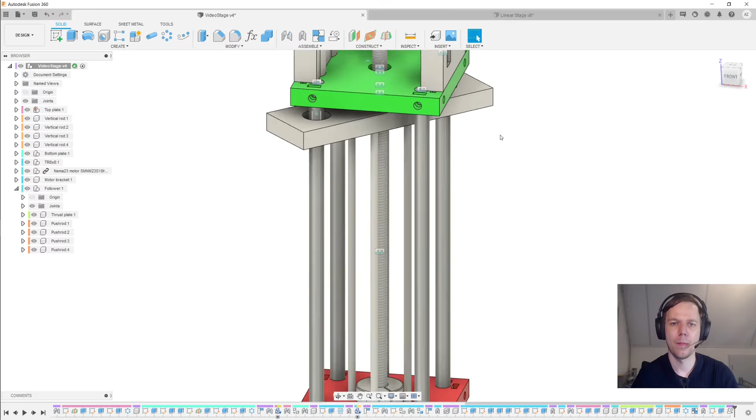The next thing we have to check is that we have the right direction on the slider and the rotation. Right now it appears to be reversed, because as I'm turning the lead screw, I actually see the threads moving upwards from this perspective, while the lead screw or pusher plate is moving downward.

So let's go back into this feature here, change this into -8, animate this again, and click OK. Now we should see that as the threads move up, the pusher plate also moves up along with it.

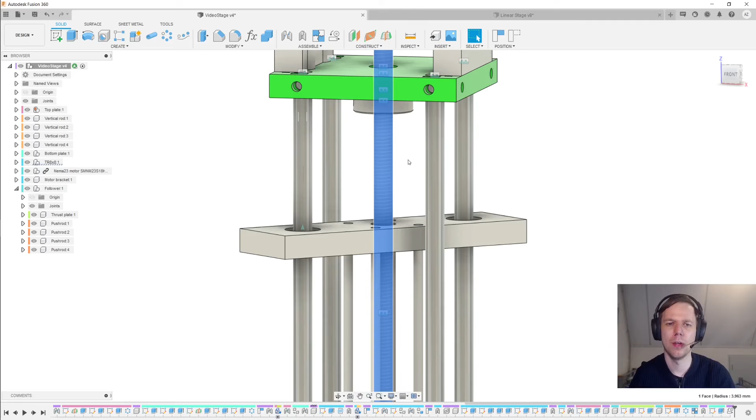The relation here isn't exact, because on this lead screw we made with a 1.5 millimeter pitch, or 1.5 millimeter lead per full rotation, that's a TR8 by 1.5 lead screw. But the actual lead screw we want to use is the TR8 by 8, which we don't have in stock in Fusion 360. If we want full accuracy there, we can model that correctly if we really need to.

One small detail I want to point out is that because there's a motion limit on the slider joint, that also means there's automatically a limit to how far this lead screw can turn, because at some point if you try to turn it further, you just conflict with this constraint. So we don't need to do any extra work for that.

The final thing I want to do for today's video is add the shaft coupler that's going to couple the motor shaft to the lead screw. For that, I'm again going to insert a McMaster-Carr component, and that component is going to be a shaft coupler.

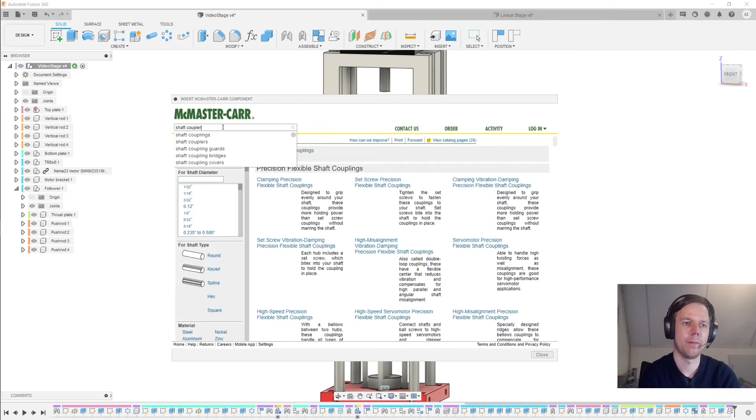It's going to be for a round shaft, metric, clamp-on. This is a model that I do like — I don't intend to buy exactly this one, but it looks a lot like the one I do want to buy. So let's go for product detail, and it's going to be 3D step again, download.

Let's put that off to the side for now. Then what we're going to do is create a joint between this guy over here and the center of this shaft over there, and then move that up by, let's say, 10 millimeters. Click OK, and now we want to see whether that actually fits any good.

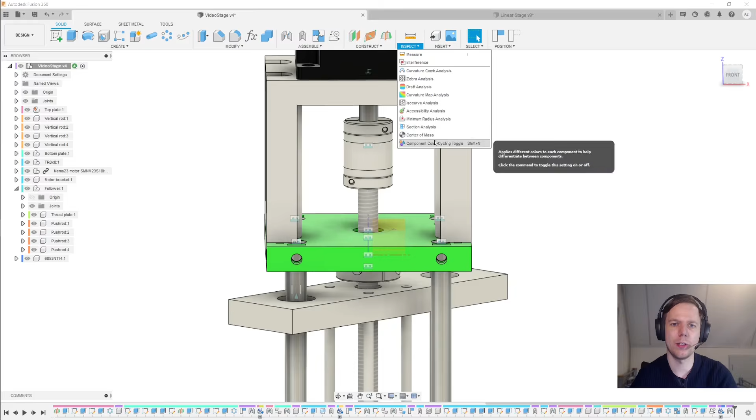So what we're going to do now is go into the origin here, and do a section analysis on this vertical plane over here. Click OK, and now we can see that the coupler is actually a little bit too far above here.

So we're going to go back into this joint over here and move that down just a little bit like so. Click OK. We could maybe have a little less space between the motor shaft and the lead screw, but whatever, that's fine.

Now we can hide the analysis here, and the next thing we're going to do is an as-built joint between the lead screw and this coupler here. That's going to be a rigid joint. Click OK.

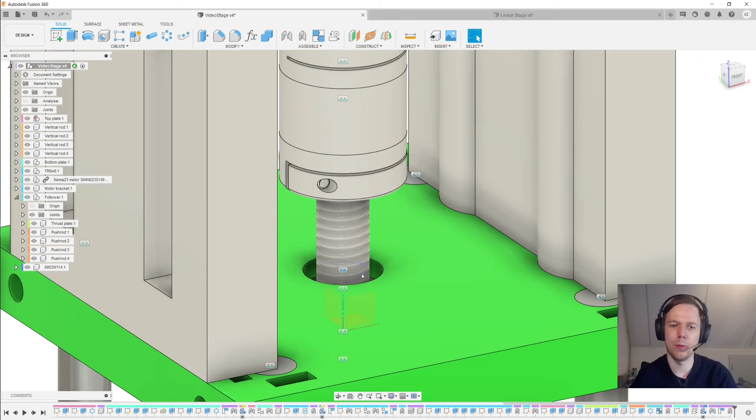Now we should see that when we animate the model on this guy, the motor shaft is forced to turn along with it, and we can also do that from the other perspective here. So if we animate the model here, we see that it works like that.

Now here it runs into that motion limit again, so let's just drag this down a little bit to the center like so. And then again do animate model on this guy. We see now that we've basically coupled both of these rotating joints via the two rigid joints in this coupler. So that's mostly the end of this video.

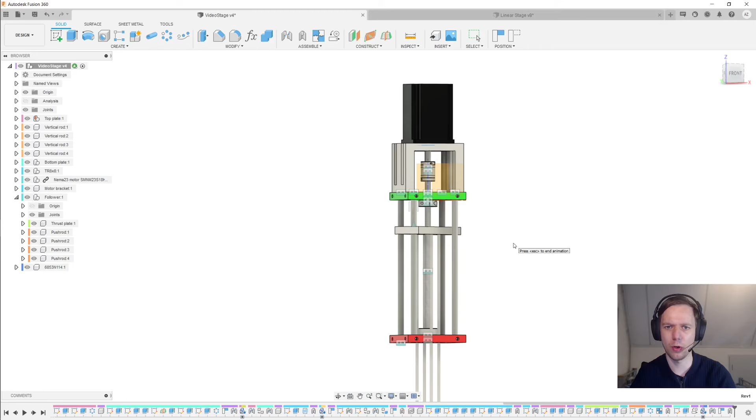There's of course still a lot to do on the model itself, but most of that should not present any new challenges. All of the stuff I wanted to teach you and show you today have basically been done.